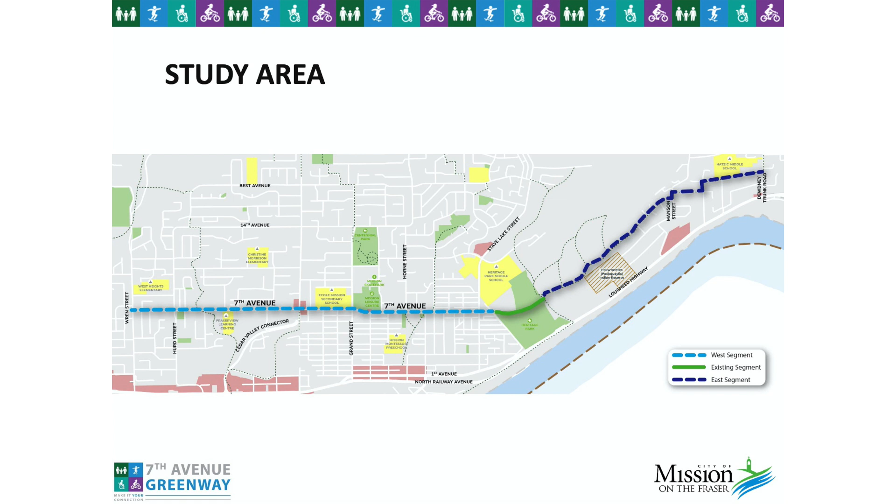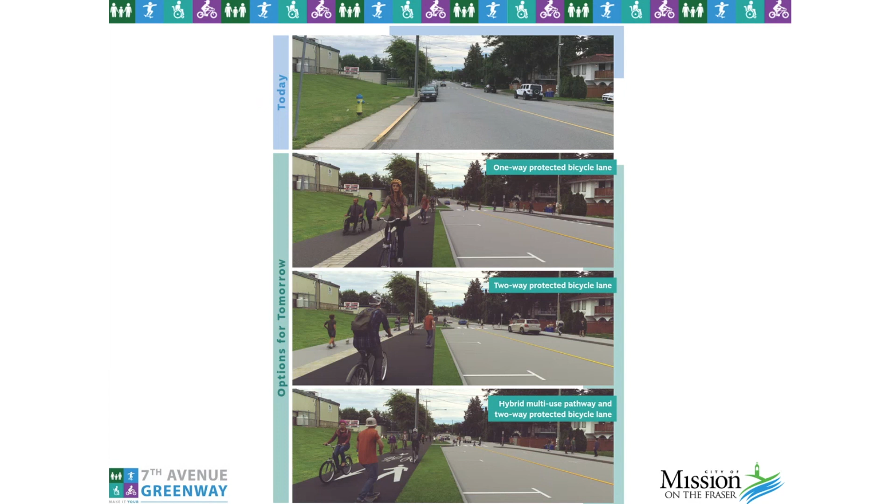So some of the reasons why this is an important project: this Greenway can actually help the city to meet a number of important focus areas that are identified in the city's strategic plan. Things like enabling a safe community. The Greenway will provide a safe place outside of the vehicle travel lanes for people of all ages and abilities to walk or roll across really almost the entire length of Mission going east to west. It really connects the entire community.

In terms of securing finance, assets, and infrastructure, the design of the Greenway represents an opportunity to access future financing for active transportation grants, both federally and provincially, to maximize the effectiveness of taxpayer funds. This can help support economic development goals through diversity of land uses and travel choices that enhance property values in the vicinity. This can help contribute to a livable, complete community, and it can also contribute to an engaged community through the engagement process that we're going through.

So the project context and history, and Paul spoke a little bit about this in the introductions. 7th Avenue has been identified as a high priority cycling corridor in a range of plans and policies spanning back almost 20 years, originally back in the 2003 Bicycle Master Plan, 2009 Parks, Trails and Bicycle Master Plan, and the 2016 Transportation Master Plan. And further to each of those plans, in 2018, Council passed a resolution essentially to complete this study, to complete a bike route along 7th Avenue to connect the Hatzic area in the east to Wren Street in the west. And so we're going through this design study, building on that council resolution.

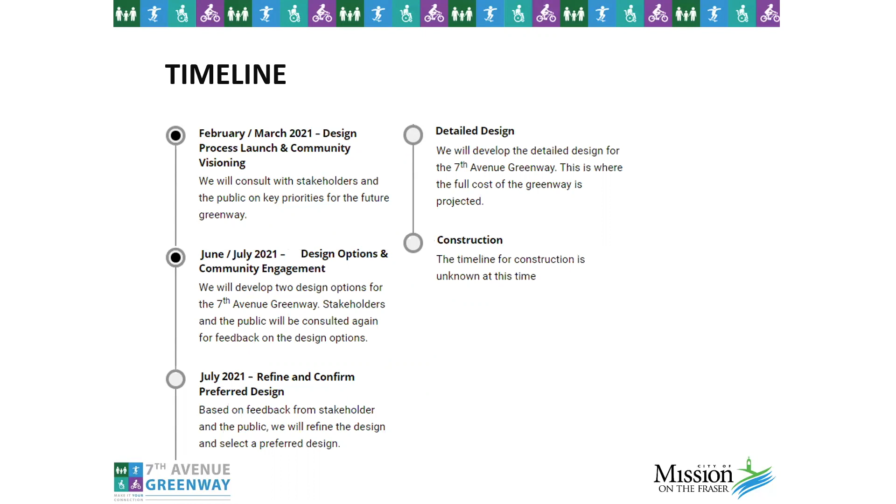Based on what we hear, we'll be working to then refine and confirm a preferred design, and then take that to detailed design and eventually to construction. As Paul mentioned, this is currently a design study, so we don't have a timeline for construction or committed capital funding at this point. That would be an outcome of this study once we have a preferred design to work through those details in terms of construction, timing, and funding.

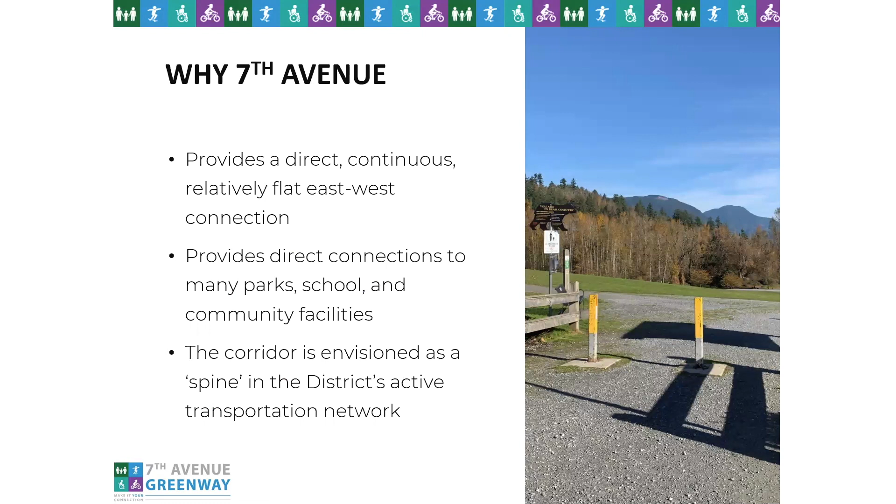So why 7th Avenue? Again, some of this was mentioned a little bit earlier. It provides a direct, continuous and relatively flat east-west connection that connects the entire width of the city of Mission, and connects a number of important destinations, many parks, schools, and community facilities. And it's envisioned as an east-west spine in the city's active transportation network. And we're calling it a greenway. And so this is much more than just a bicycle facility.

We're looking at how we can improve travel options for all forms of active transportation, whether people are choosing to walk, ride, or roll. So that can include cyclists, but also pedestrians, skateboarders, rollerbladers, parents or others using strollers, and people with mobility aids. And we're also really focusing on how people can travel not only for transportation or commuting purposes, but also the recreational options, given all the connections along the corridor to recreational destinations like Mission Secondary School, the Mission Leisure Center, the Mission Skate Park, and Fraser River Heritage Park. So we see this corridor as a connection to a lot of these recreational destinations that hopefully will encourage people to choose active transportation to get there.

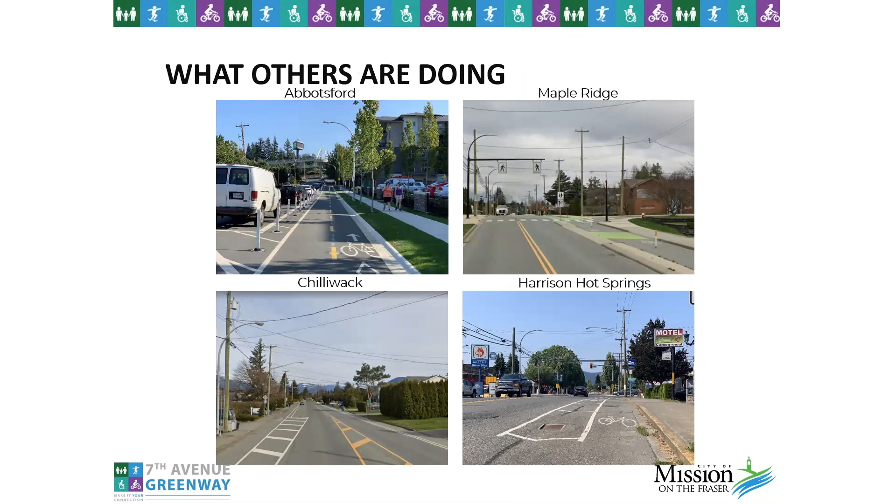So looking at what some other communities are doing, investing in greenways or all ages and abilities active transportation facilities is something that communities across BC and North America are doing, including many communities surrounding Mission in the Fraser Valley. Just some examples here of some similar greenways in Abbotsford and Maple Ridge, and some other bicycle facilities in Chilliwack and Harrison Hot Springs, just to give some context about how other communities are prioritizing and focusing on active transportation.

So one thing we're really focusing on, building on some of those previous slides, is mobility for people of all ages and abilities. So we're really looking at providing a facility that can be comfortable for anybody from 8 years old to 80 years old and beyond. So that includes children and families and seniors, and providing a safe and comfortable mobility choice. That's really looking at providing equitable transportation options, inclusive options, age-friendly options, and designing a corridor that's accessible and safe for everyone.

And what we're really hoping to attract through this project is what we call the interested but concerned segment of the population, which often makes up anywhere from 37 to 60% of the population. And so these are people who maybe aren't cycling currently or don't feel comfortable riding on busy roads. These are people who might ride recreationally or have a bicycle, but just don't feel safe riding next to vehicle traffic. So we're really trying to provide a facility that could be safe and comfortable and attractive to those types of users.

So there's a number of issues that we're looking to address through this study. And again, looking at improving the street, not only for cyclists, but for all road users. And there's lots of things we need to consider and balance through this process. First and foremost, looking at the needs of mobility along the corridor. So traffic operations and goods movement are really important things to think about.

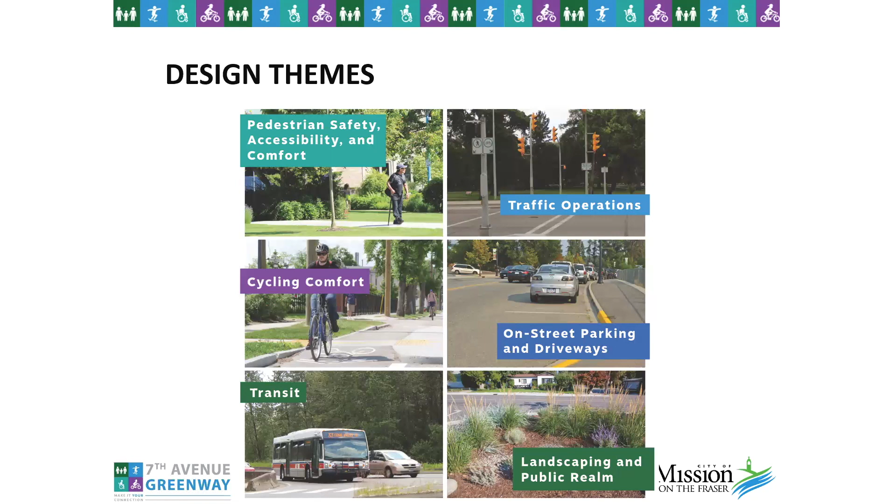Great. Thanks, Brian. Yeah, so as Brian mentioned, and building off the public engagement results that we saw during the first round of engagement, we created as a project team 6 key design themes that we worked to integrate into our concepts to bring to you tonight. So those 6 themes are pedestrian safety, accessibility and comfort, traffic operations, cycling comfort, on-street parking and driveways, transit, and landscaping and public realm. And so we looked at design opportunities for each of these 6 themes, and we'll highlight some of the opportunities that we included in our designs in the next few slides.

So starting first with really that same vision, as this is a greenway that's a street for everyone. It's looking to be inclusive and create opportunities for a safe, comfortable street for all. The first theme of pedestrian safety, accessibility, and comfort focuses on how we can make it better for pedestrians, essentially, with new crosswalks, new curb extensions. There's a new crosswalk with a pedestrian refuge island at Horne Street, so providing protection partway across the crosswalk.

The bicycle lane is raised to sidewalk level at crosswalks to improve accessibility and ensure safe connections across the road, and then improved pedestrian experience and connections to Fraser River Heritage Park and the East Mission Heritage Greenway.

Second theme of traffic operations, so recognizing that we want to ensure traffic operations and traffic flow is maintained. We are maintaining two-way traffic. All existing left turn lanes are maintained, and the opportunity for a future north-south left turn lane at Cedar Street has also been identified. We're adding a new traffic signal at Murray Street, which has been identified previously and would be a great opportunity to implement through this project.

And then we've added new left turn lanes to improve traffic flow at both Horne Street and Dunsmuir Street. Then the final piece is an intersection realignment at Stave Lake Street on the east end of the corridor where there's a skewed intersection currently.

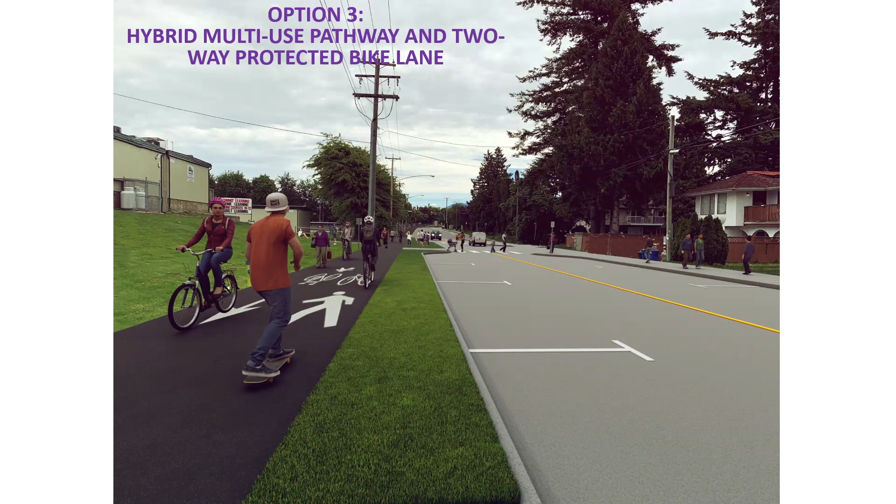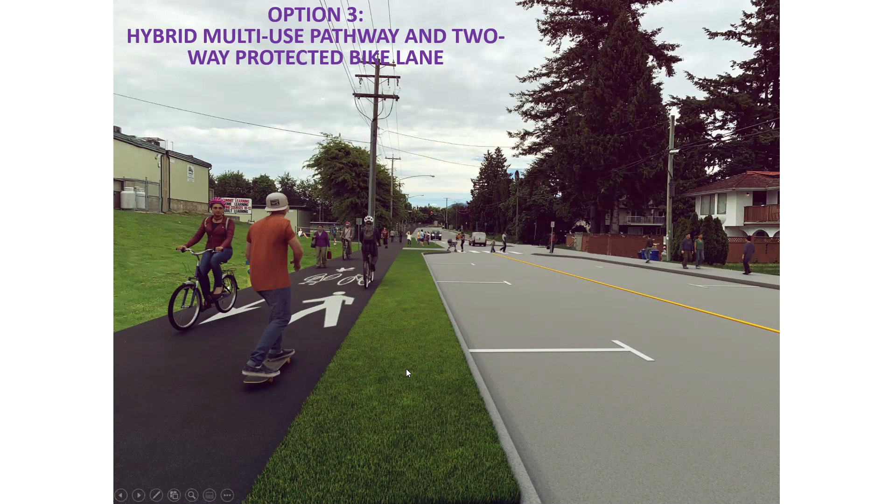And then the final option, which was only explored through this one segment, is a hybrid multi-use pathway, with two-way protected bike lanes east and west of this segment that we're looking at. But through this segment, this key segment where we're working to retain all on-street parking, we have a multi-use path which is shared by people walking and biking. Once again, only on the north side of the street, and it is separated from parking lanes. So there's still on-street parking on both sides of the street.

And through our stakeholder engagement, we've shared these concepts with the school and asked for their feedback, and that feedback will be used to help us make a decision. Their preference is for a separated facility in front of the school. So having people walking separate from people biking or rolling. Recognizing that this is an area that gets busy with people walking, biking, and driving during school pickup and drop-off hours, and that having separated facilities for them, they think is the safer option.

So with that, we have now our design sheets, which highlight the entire corridor from the west end at Wren Street, and highlighting some key features all the way through to the east end of the corridor. And we can walk through these sheets sheet by sheet, but the key concept and layout is that the top option is option one with one-way protected bicycle lanes on the north and south sides of the street, and only on-street parking on the south side of the street. And then option two is two-way protected bicycle lanes only on the north side of the street, and parking once again only on the south side of the street.

There's a number of key features that are called out in both of the maps. So pedestrian safety features, there's curb extensions in front of the retirement residence. And then the bicycle lane is raised for that crossing location as well. So this creates a safe, accessible crossing place for people coming to and from the residence and accessing the park on the south side of the road. Traffic operation. So as we mentioned earlier, two-way traffic is maintained, and existing left turn lanes are also maintained at Hurd Street, which you can see in the middle.

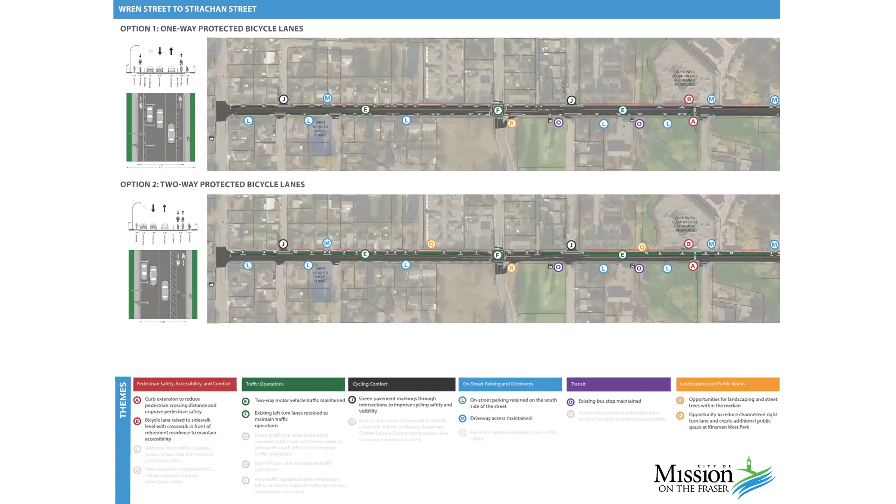So the same configuration here for the next section from Strachan to Maple Street, where option one-way protected bicycle lanes are on the top and two-way protected bicycle lanes on the bottom. Many of the features are the same for each of these options. So once again, crosswalks and a pedestrian refuge island is introduced. Oh, that's actually not on this. Oh, okay, yeah, it's not on this page. I think that might have been a mistake.

Yeah, not actually on this page. I think so. That's on the next page. Two-way motor vehicle traffic is maintained. Existing left turn lanes are maintained. Once again, similar to the previous option, there's opportunities for landscaping and street trees within the median.

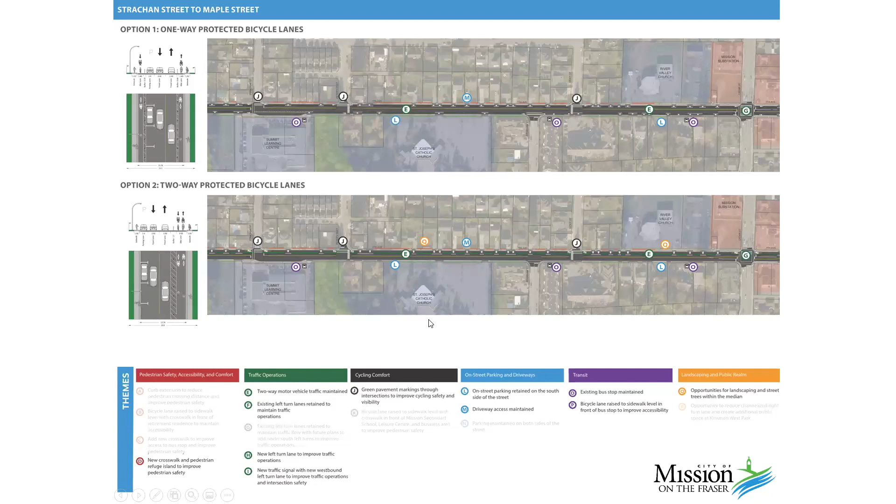On only option two; the space between the cars and the bikes in option one is a little bit narrow and doesn't provide enough space for more significant landscaping or street trees. And maybe we'll skip to the next slide here. If there's specific questions about locations along the corridor, feel free to put them in the Q&A, and we can answer those questions either at the end or now as we go and kind of zoom in to give you a little bit more detail.

So the section that we show the rendering of is the one section along the corridor where it explored a third option. And this third option was really looked at as a way to retain on-street parking, limit property impacts, as well as recognizing there's some mature trees on the north side of 7th, just to the west of Grand Street. And so when we were looking at the first option, the one-way protected bicycle lanes, this section actually pushes those bike lanes and the sidewalk a little bit to the north through the school property and requires a little bit of property to be acquired from the school, as well as expanding the property lines into the area just south of the leisure center.

And this is really done to maximize on-street parking through an area where we've heard there was quite a high demand. Two-way protected bike lanes in option two is a similar story. So once again, maximizing on-street parking through the section, but requiring a little bit more road space to be allocated. And then option three, the multi-use pathway doesn't require as much space because there's not a physical separation between people biking and walking. And that means that it's able to fit within the existing road allowance.

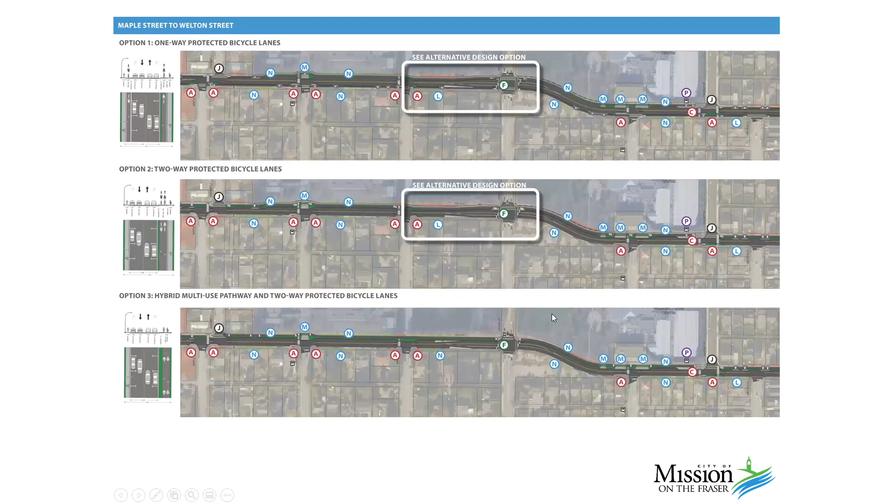We've developed two sub options, which you can see highlighted at the top of the screen for option one and option two, where we've looked at how maintaining as much parking as possible will have an impact on some mature trees just to the west of Grand Street, as I've mentioned. So if you look at the top of the screen, option 1A with the street trees retained, you're eliminating about 4 additional on-street parking spaces, but those street trees would potentially be maintained. Option 1B, those street trees would most likely be lost, but would allow an additional 4 parking spaces.

And then similar for option 2. So with the two-way protected bicycle lanes, the same configuration of losing parking but retaining trees, or the other way around. So 2 sub options to consider as we're looking to select our preferred option. We'll keep moving along here.

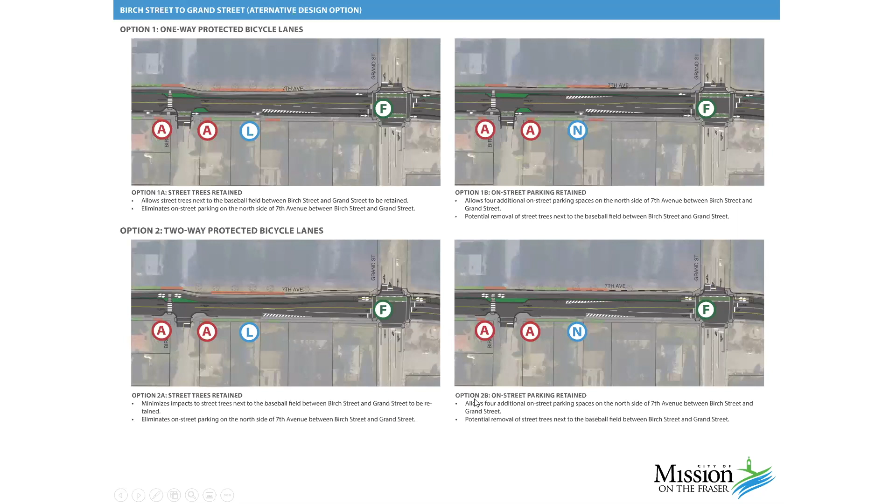So the next sheet is showing from Welton Street to Stave Lake Street. So this is the area just to the east of the leisure center. Once again, we have option 1 with one-way protected bicycle lanes at the top of the page, and then two-way protected bicycle lanes in the middle of the page. Very similar to the previous section. One area to highlight, this is where the crosswalk with the refuge island is in front of the fire hall. So it's one area, at Horn Street, where some additional pedestrian safety is being introduced.

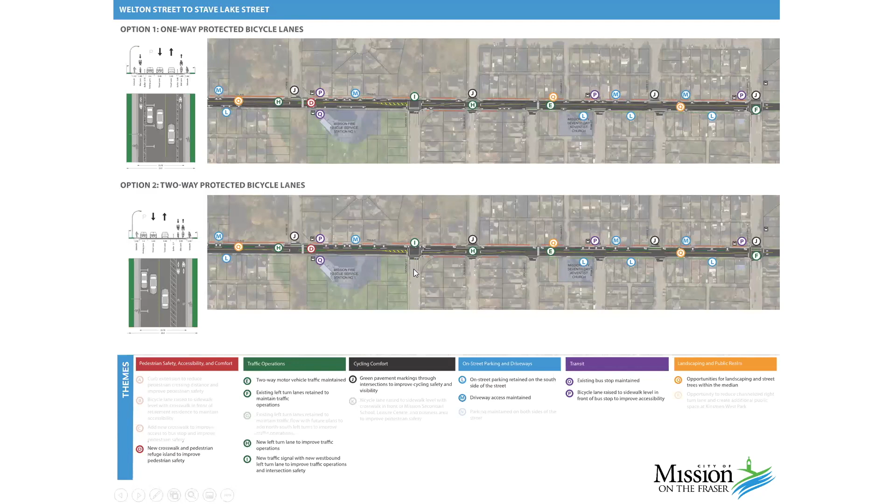And then at James, the new intersection, I should remember the name, the new intersection just to the east of the fire station is where a new signal is being proposed. Yeah, right there. Similar, yeah, so same idea as the previous boards.

And then the final section from Stave Lake through to Heritage Park is where the facility actually changes; the traffic volumes drop drastically because the road no longer goes through. And because of that, our recommended design has been changed as well, where we're recommending a shared roadway with people biking and people driving sharing the space.

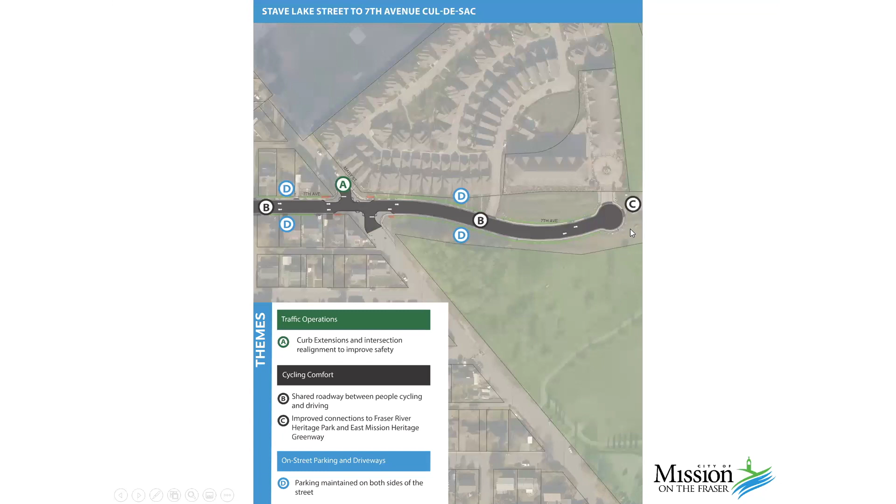And this is where at Stave Lake Street, we've also identified an intersection realignment to improve pedestrian safety and driver safety, where the existing skewed intersection creates really challenging sightlines and long crossing distances. So this will provide that connection into Heritage Park and minimize parking impacts through this section of the corridor. Okay, and that is it for our presentation.

So maybe I'll pass it back over to Abby Jane and she can kind of help us walk through the questions that have come in so far. Yeah, thank you, Brian and Brent. We have a couple of questions that have come in. The first one is pertaining to how the Greenway will impact the clearing of snow. So I'm not sure if that's a Brent question, perhaps.

Yeah, I can speak to that first, and then maybe Paul can jump in as well if there's anything from the city's perspective. I'm going to take this question as what are the impacts for clearing snow on the Greenway itself? It depends on the option that's selected. So the one-way option, which is a little bit narrower, will require different equipment than is probably currently used on the streets in Mission and is typically used specifically for sidewalks or narrow pathways.